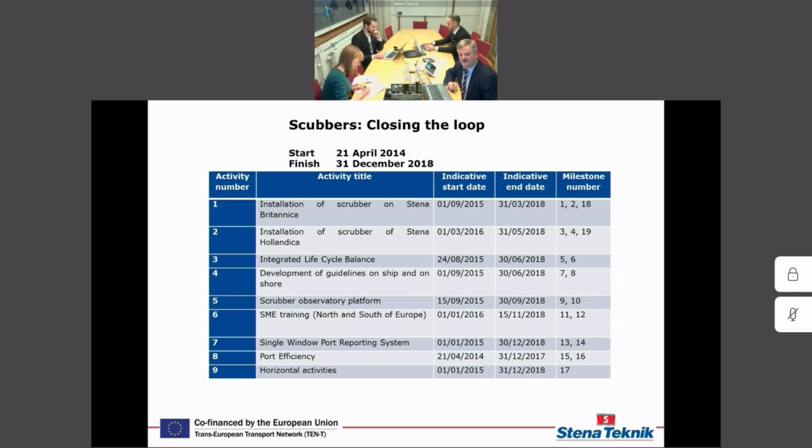We are talking about two ships, Stena Britannica and Stena Hollandica, running between Hoek van Holland in Rotterdam and over to Harwich in UK. We have been doing efficiency work in both ports within this project. But today we are going to talk about the scrubbers, which are on Stena Britannica and Stena Hollandica, where we've been doing installations with closed loop scrubbers.

In connection with this project, we are looking into what I call the soft parts of the project - the technical analysis and so on. We learned that back in 2015, 2016, when we were doing this, there was not much knowledge actually about what is in the scrubber water, what the scrubbers are really doing, and so on. So we have put quite a lot of effort into this also.

As you can see here, Hulda will tell us about the measurement campaigns and the analysis of data, and we have also done the life cycle analysis and the cost benefit analysis. But we are not going so deep into this today, I think.

The next activity was the development of guidelines for ship and shore, and we will hear more about that from Lloyd's Register later on.

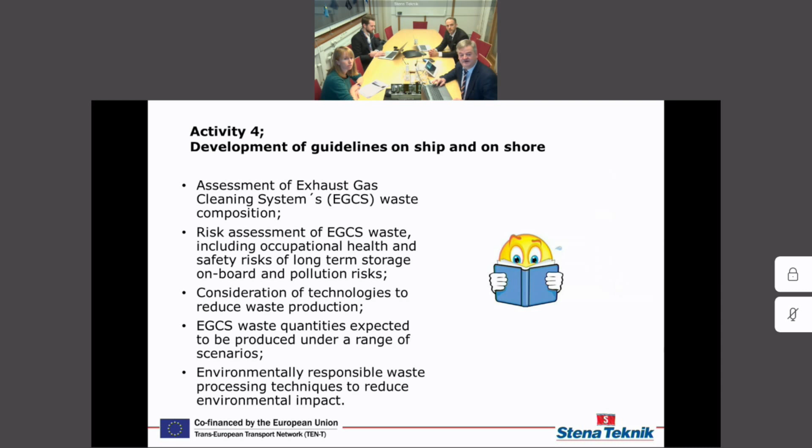We also have the dissemination part of this, which is what we call the Scrubber Observatory Platform. So far we've had two conferences where we have been discussing and presenting our results.

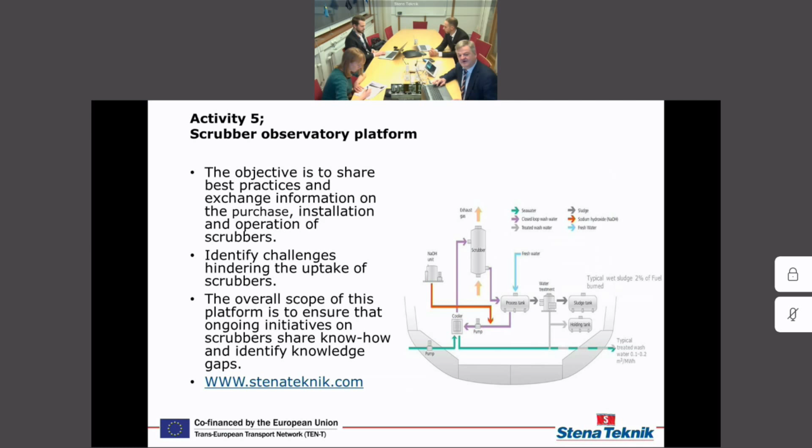This is, you could say, the third conference, but this time it is a little more connected to what we call SME training, North and South of Europe. When we wrote the proposal for this project, that was very much a buzzword - SME training and so on. The idea we had was that we in the northern part of Europe, within the SECA area, we have to start with this, with the scrubbers and so on.

And then at 2020, of course, the rest of Europe and the rest of the world will also have sulfur limits. And then it would be reasonable that we, who are collecting experience already, share that with other partners. So that's the reason why we have this work package.

And I would say that this is what we are doing right now, since we are doing a cost-effective way of doing a conference right now. So in that sense, it's available for everybody. You don't have to make expensive travels and so on.

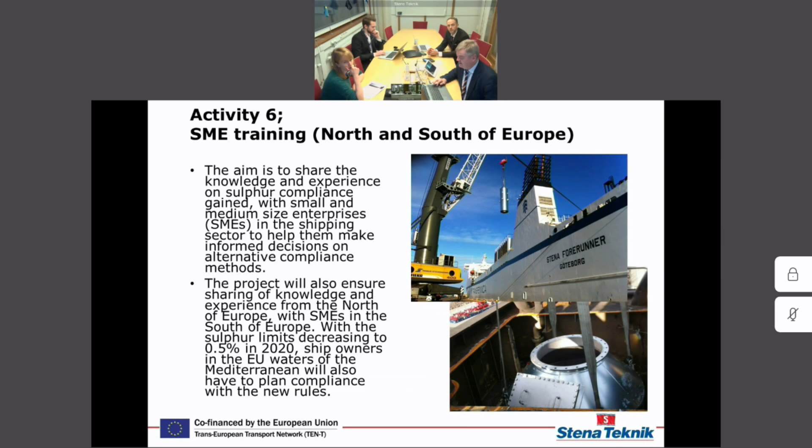We have some other activities also, but the single window port reporting system is unfortunately on hold because of political reasons within the European Union. The port efficiency I told you about, but that's really not with scrubbers, so we leave that. And then of course you always have some horizontal activities.

I will leave it by that, and then I will give the word to Björn, who will introduce us into the magic of our scrubber installations. Thank you.

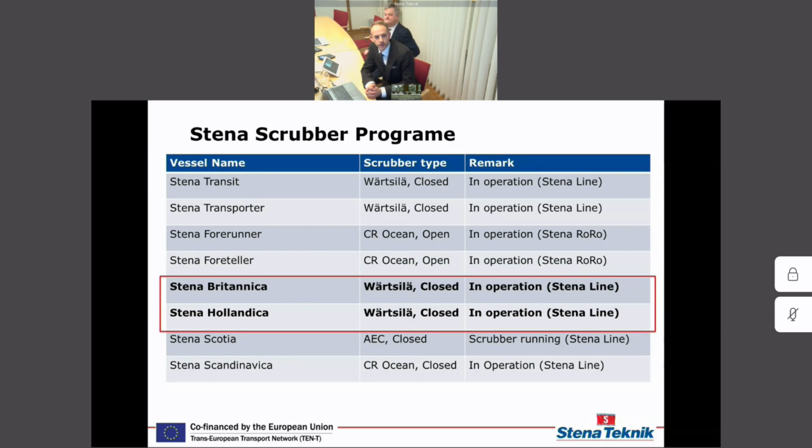Just to give you a little bit of background to where Stena are in the scrubber installation project, we have so far converted 6 vessels by now with scrubbers for Stena Line. They are all closed loop scrubbers, and today we are going to talk about the Stena Hollandica and the Britannica case mostly, which has been co-financed by the European Union.

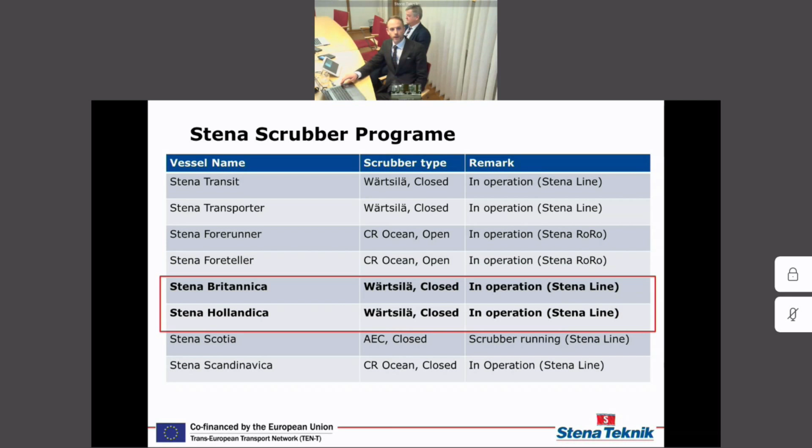Just to give you the idea, let me first tell you what we're not doing in this project, as it's called closing the loop. We've not been installing an open loop scrubber, but for those of you who may not know how it works, I'll give you that for reference.

So in an open loop scrubber, we take seawater in and basically spray it over the exhaust coming from the engine, and then you drain that water out, and by that method you scrub the SO2 and SO3 emissions more or less out of the flue gas and some other things that come with in the process, like soot. They're also washed overboard, which is completely within the regulations.

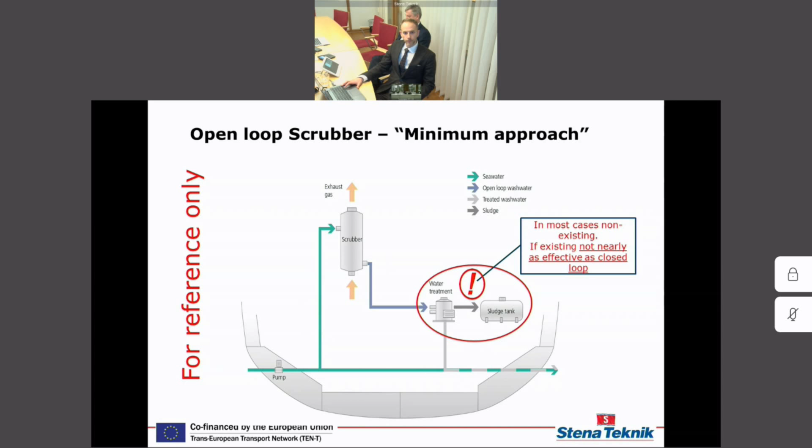In some cases, there is a water treatment plant installed to clean the effluent water before discharge overboard, but in most cases, I would say it's not installed in the larger number of ships today. The open loop scrubber works on the principle that it's using the alkalinity of the seawater and discharging a low pH, acidic effluent into the water.

Looking at the closed loop scrubber, we have a bit different situation. What we do is circulate the scrubber water in a closed system that accumulates sulfates, the sulfur washed out of the exhaust stream. That's why we need to take part of that water out every now and then, or continuously, and take it through a cleaning process, then discharge a smaller amount of water with sulfates overboard.

In order for the closed loop system to work, we need to add an alkaline as it is consumed in the process. In most cases, it's sodium hydroxide, caustic soda. We started off doing that. We have actually now shifted to magnesium hydroxide in these ships just recently, which works in principle the same way in the scrubber process.

The main difference here between the open loop and the closed loop is that we can implement a much better water treatment facility in this system, which is much more efficient than what you could do in the high flow rate that you have in an open loop system. We then also collect the sludge on board. I'll go more into detail with that later on in this presentation.

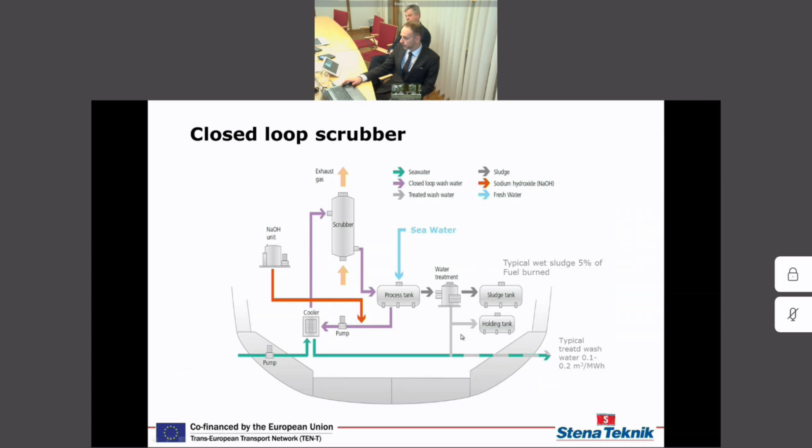Looking at what we collect, the essential part here is that we generate a sludge from the scrubber system, which will then go onshore to a facility. We'll show you more about that later, and that will end up in cement. In the end, the ashes will also end up in cement.

What we see here on the picture to the left is a glass of the initial part of the sludge. We have a fraction that's heavy, which sinks to the bottom, separated out from the water. We have a top part that's floating up, which is lighter, so oily, which is also separated out. And the yellow portion, the water containing sulfates, is discharged overboard.

What we collect looks something like you see on the right two pictures here. It's relatively pasty mud that we collect, we usually refer to it as clay, and this is collected and disposed of ashore. To give you the scale of this, we collect roughly 1% of the fuel we burn in the form of this clay. For the 4 vessels we operate out of Hook of Holland, this is in the neighborhood of 450 tons. We tend to run it a little more wet these days, so it's probably a bit more water contained in this.

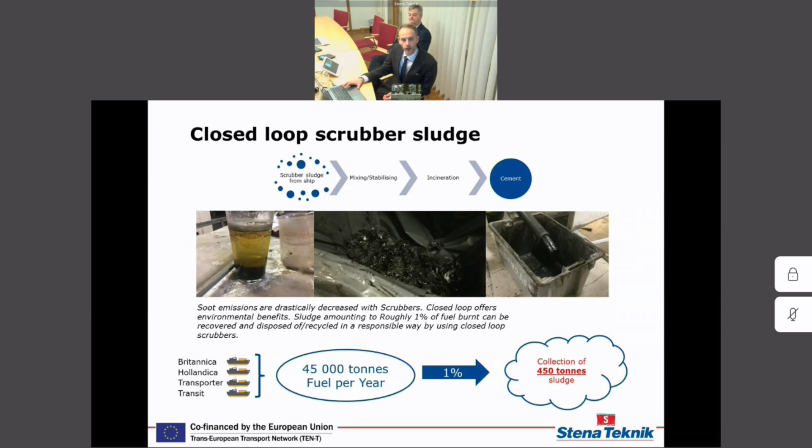Here are the reaction formulas for the scrubbing process. I won't bore you with them, but just to understand why we're going to the closed loop scrubber: we thought the open loop scrubber could contribute to acidification of the sea, and there's no really efficient way of cleaning the water from the other things that come with the process, like particles, hydrocarbons, and heavy metals. Those are the two main negative things we see with the open loop, which we could improve by implementing a closed loop system, generating a pH neutral effluent to the sea and catching most of the particles and hydrocarbons before discharging anything to the water.

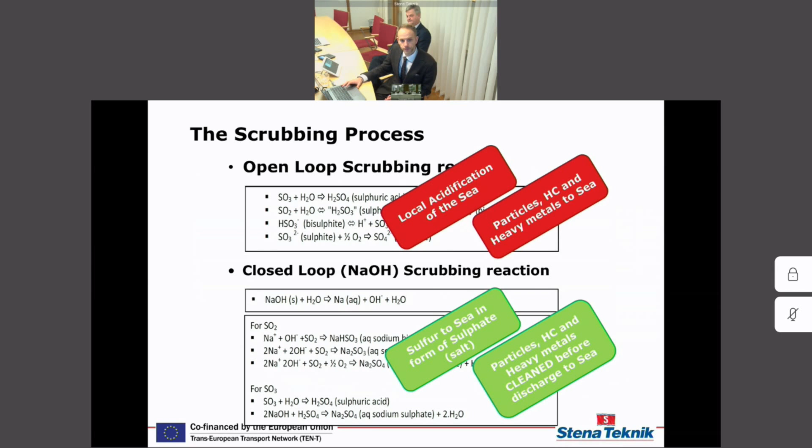Looking at the water cleaning system in close-up, what we've implemented is that we take some of the water out from the scrubber water and run it through a dissolved air flotation unit, called DAF, which then goes into a sludge tank. Here we typically have a water content in the sludge of about 90%, so only 10% solids in this tank. Then we go to a secondary step in the cleaning cycle, through a decantering system, which takes more water out, and we end up with something that's about 30% solid in the sludge that we discharge up to a shore facility.

The other two cleaned water streams then go through a water monitoring system to make sure it's in compliance with regulations, and it's then discharged overboard.

This is just what the IMO says by clean - this is what we have to live up to according to the MARPOL regulations. The turbidity should not be too high, the polyaromatic hydrocarbon level is limited, and the pH needs to be above 6.5.

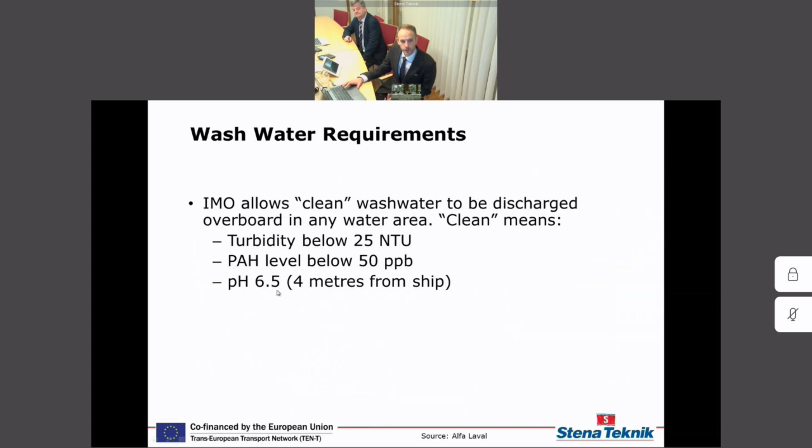To give you an idea of where we are with turbidity, which is the clearness of the water, we can see on this scale that we need to be below 25, and we're somewhere around here, so it's relatively clear water. Again, this is the glass - this is typically what's discharged overboard, the yellow portion, the clear fraction discharged overboard.

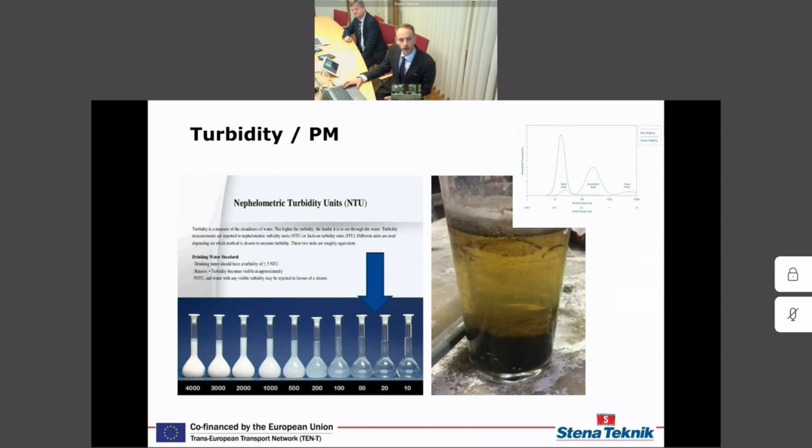Water monitoring is done through an extractive instrument. We've seen that we've had a little bit of problems with clogging of some of the pipes on occasions in these closed loop systems - that's a bit of hassle to the crew. Otherwise, we think it's working pretty well.

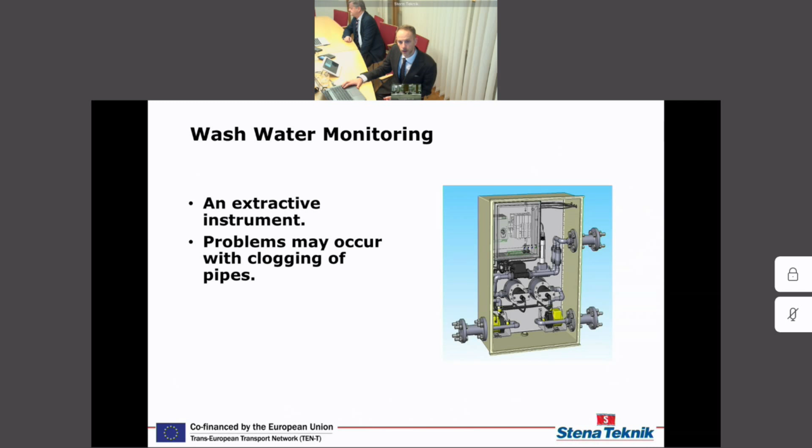This is measured in our case by a Consilium system, a light emitting system.

That is a direct method of measuring through the exhaust gas stream in the exhaust pipe, so not an extractive method.

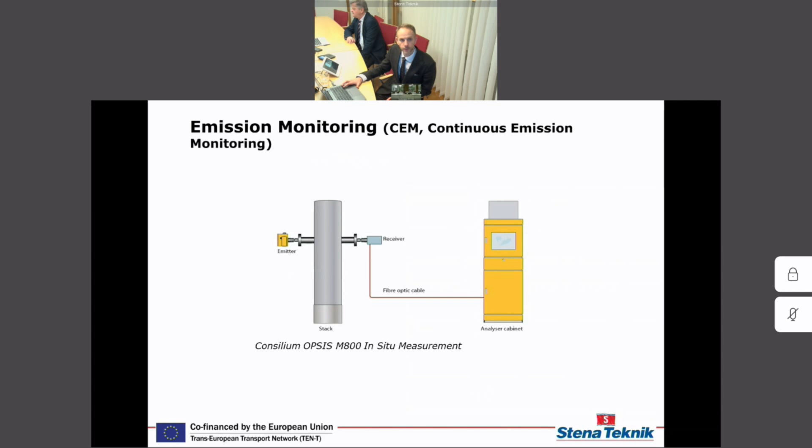The Stena Hollandica and the Britannica are two of the world's largest ferries. They have total main engine power of about 33.6 megawatts and are capable of about 22 knots of speed. They carry about 5.5 kilometers of freight, amounting to about 320 trucks and trailers. It's a four main engine arrangement with two larger and two smaller engines.

We are scrubbing only the main engines on these ships. The auxiliary engines and the boilers are running low sulfur fuel oil.

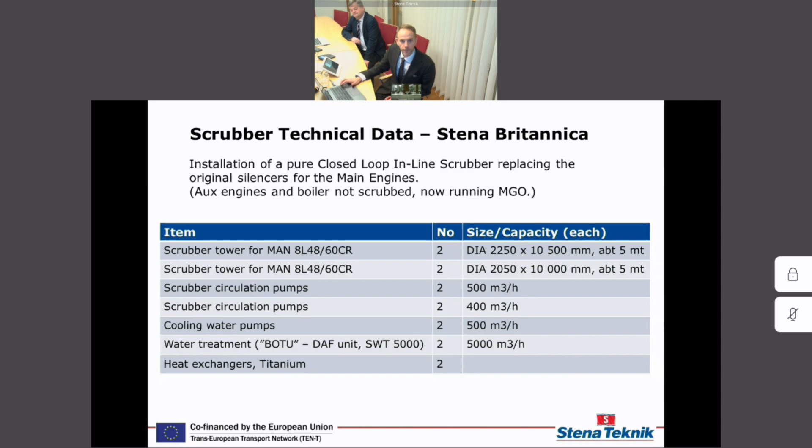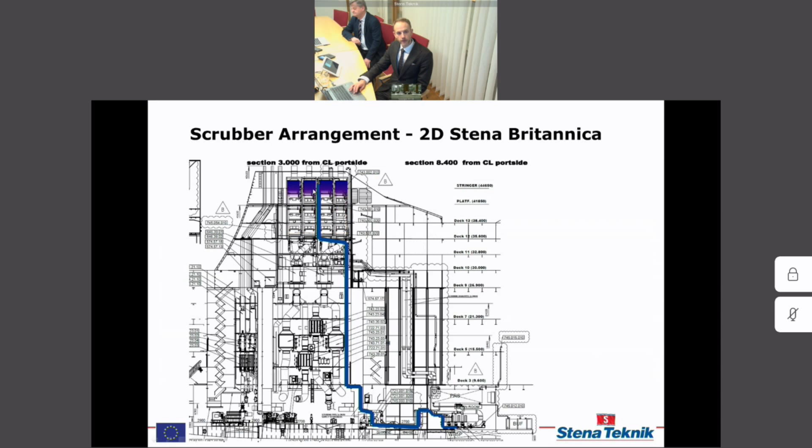Looking at the arrangement of the system, down in the basement we have 4 circulating pumps supplying water through a pipe system up to the funnel and to 4 inline scrubber units. Water is then sprayed over the exhaust coming up through the pipes, and is then drained down through large pipes to a process water tank where it all starts over again. That's the main principle of the system.

This is the same thing, only from our 3D model.

Just to give a bit of detail on the exhaust gas arrangement, in this case we have SCR units installed for reduction of NOx emissions. We have economizers, exhaust gas boilers, and then the scrubbers last in line, and that seems to work okay. On the Hollandica and the Britannica, the SCRs are currently not running, though they probably will be in the near future. We have other ships where they are running in combination with the scrubber successfully.

The main thing here is that we want the high temperature exhaust, which we need for the SCR to work properly. We then take some of the temperature out in the boilers, and then go into the scrubbers, which are operating at a relatively low temperature.

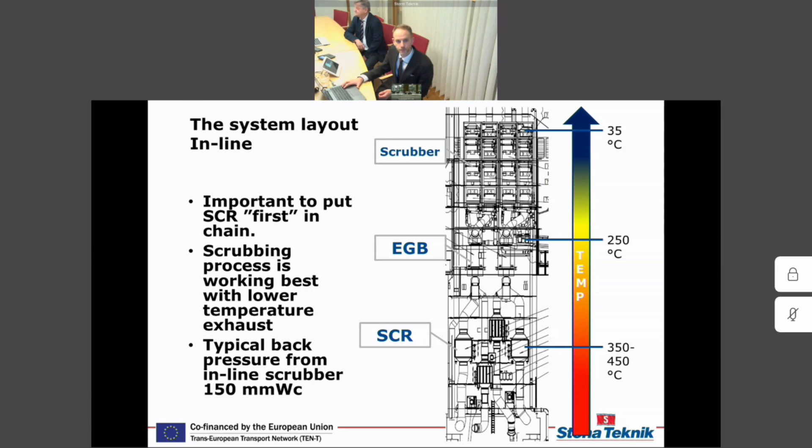Scrubber installation was done at Damen shipyards in Rotterdam. We were 11 days in dry dock to do the installation. We had the scrubbers assembled into units that went into the funnel as one piece, to keep it as short as possible. We then finalized the system in service, which was quite a bit of hassle, including making the final bits of pipework and electrical installations.

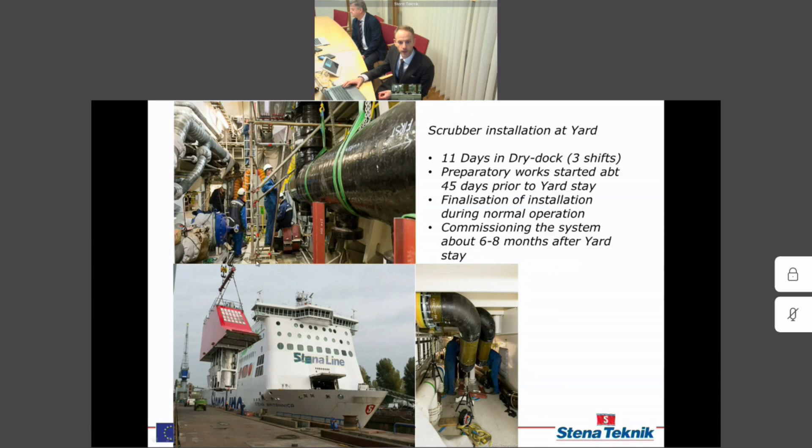Here are some photos from the yard when we did the actual installation. You can see how we started building the scrubbers into modules that went into this funnel module, which was put on top.

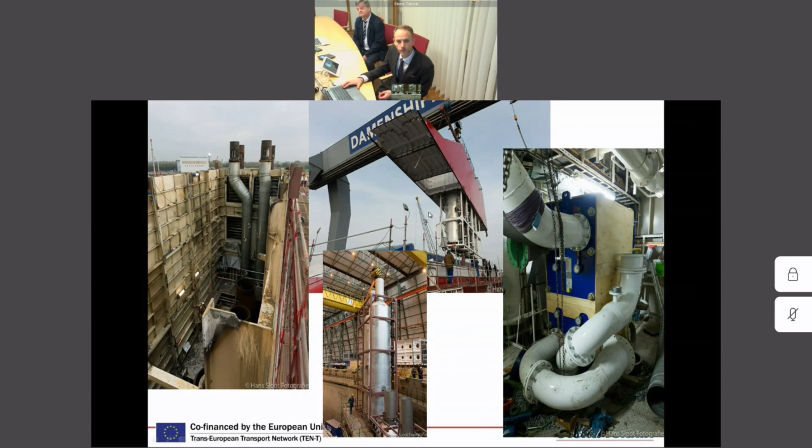Everything was built according to a 3D model generated after 3D laser scanning. Otherwise this would not have been possible to do in such a short period of time.

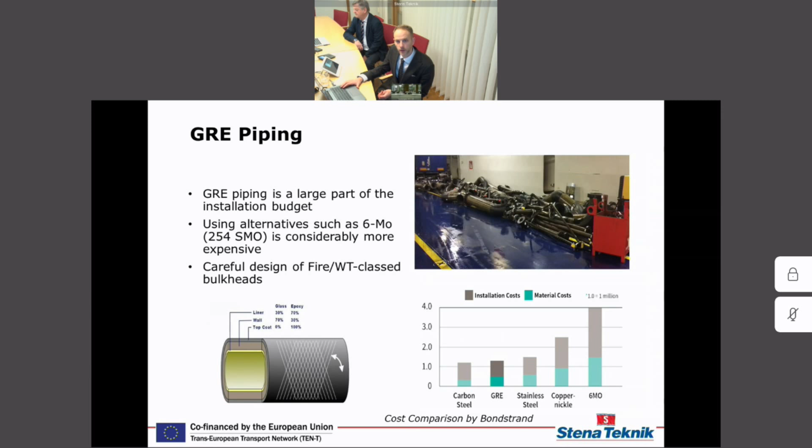A lot of GRE piping was used, hundreds of meters of it in the system. Here you can see a photo of what it looked like at the beginning of the installation, when we took most of the pipes on board.

The pumps are relatively large units installed in the port side fin stabilizer room on board.

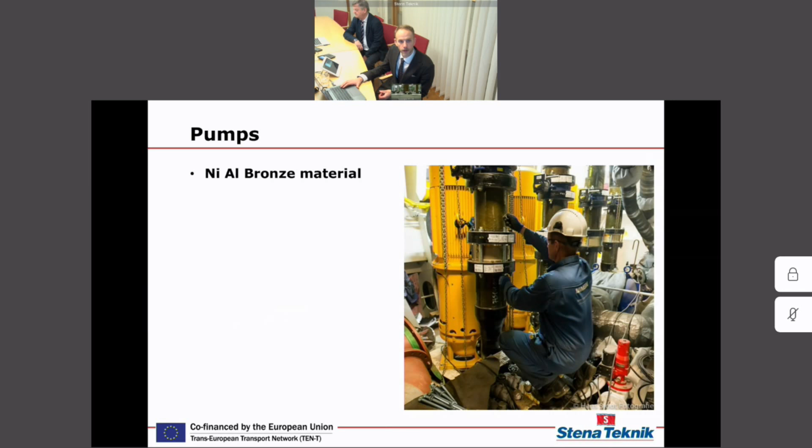To sum up, we've installed a closed loop scrubber, which we think enables better water cleaning compared to open loop. We do not contribute to the acidification of the sea with this system, as we are adding an alkaline to the system. SOx emissions are removed well below regulatory limits, so we are better than changing to 0.1% fuel in that sense. We are also collecting a significant amount of soot that can be handled by state-of-the-art processes on shore.

To give a little bit more detail about that, we have a movie to show you.

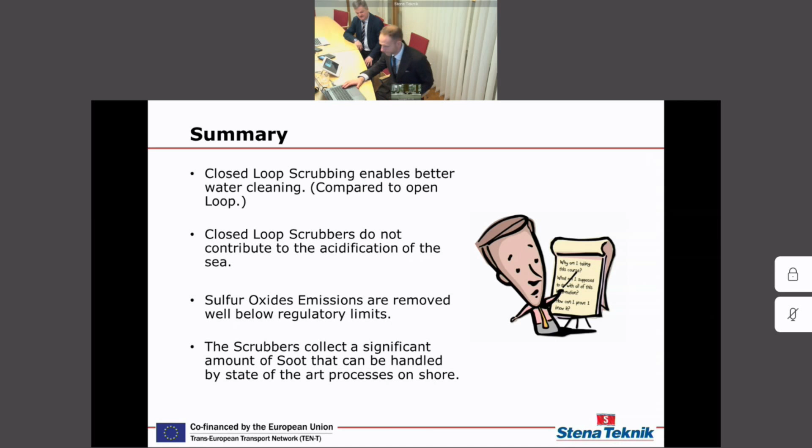That we will do it later. The movie will come a little later. First we will see the movie. Okay, sorry, with the installation. Sorry about that. So let's run the movie. Here we go.

It's February 25th, 2017. At Damen Ship Repair Rotterdam, a new guest is welcomed, the Stena Hollandica. Stena Hollandica is one of our super ferries and is 240 meters long, 32 meters wide. Can take 1,200 passengers and 320 truck trailers, and then next to that, about 250 cars.

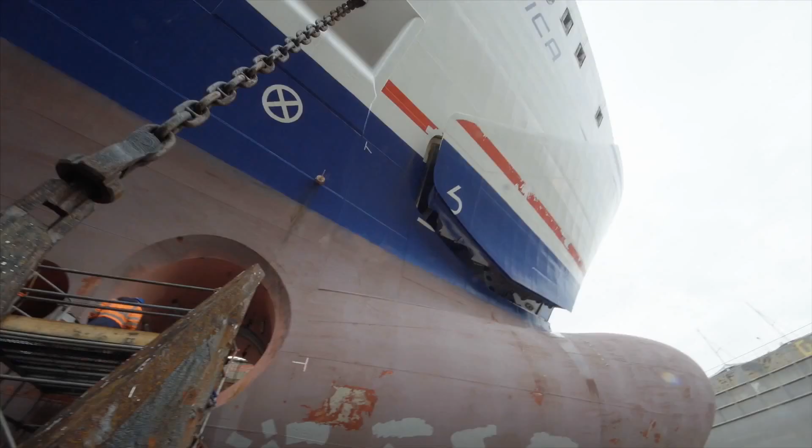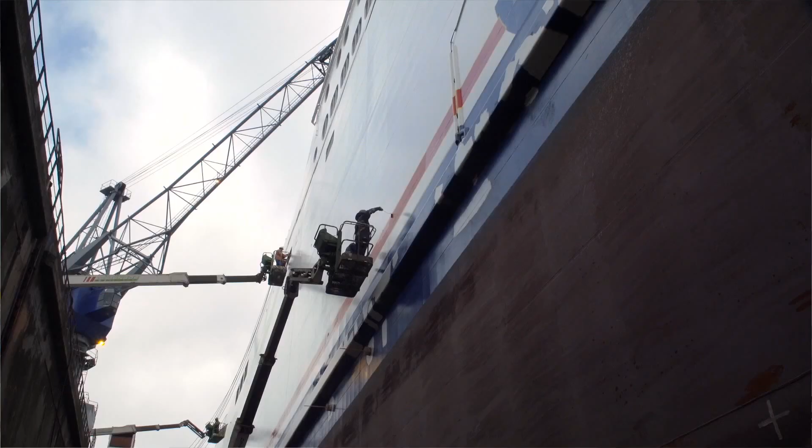A lot of work needs to be done on the Hollandica before she sails off again in less than 2 weeks. At the moment we're at the yard for conversion to scrubber installation in our funnels, and in the meantime we also take the time for a normal docking. In the end, some of the most complex work on the Hollandica will hardly be visible. However, it is proof of Stena's commitment to a sustainable future.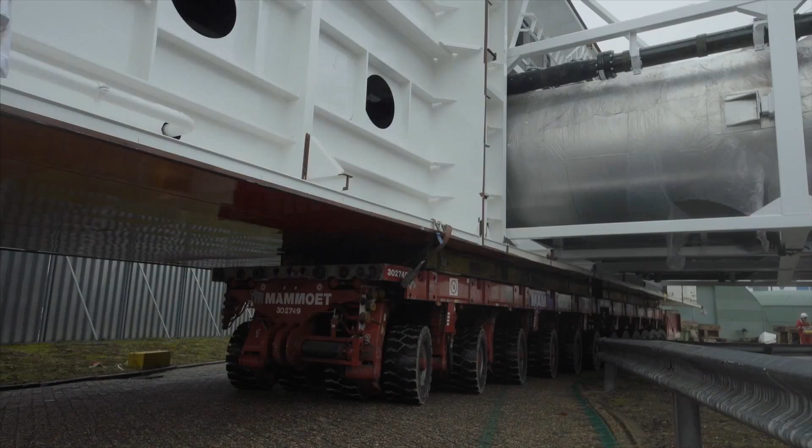We're installing here a scrubber installation. There's a big wash plant for the exhaust fumes that takes out the sulfur and fine particles that is normally blown into the air. We install a closed loop scrubber installation compared to an open loop scrubber, which is also possible. In our case, all the particles will be kept on board and then given ashore for recycling or reuse.

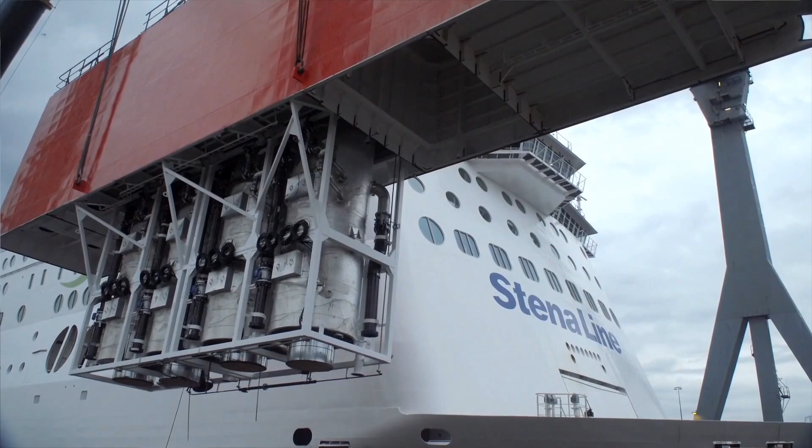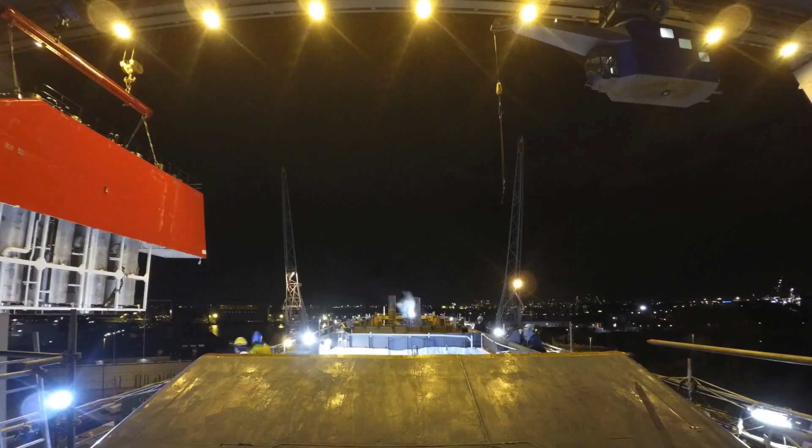We have installed a variety of scrubber installations on different types of ships. Each individual project is unique for the scrubber installations, so we have experience in that. We can really support the client with design and our experience from the installations.

It has been hard work, but only 12 days after she arrived, the Stena Hollandica is ready to leave Damen Ship Repair Rotterdam, freshly painted, serviced, and most important, ready to take passengers across the North Sea, more sustainable and in better comfort.

Okay, I hope that gave you a little idea about the sizes and what this really is all about when it comes to installation of scrubbers. It's quite amazing, the sizes of everything actually. So after that, I know that already some have been asking us about what is in the effluent water and so on. So I think that gives a good reason for Hulda to take over now and to tell us about the scrubbers from an environmental perspective. Thank you.

Yes, so my name is Hulda Winnes. I'm with IVL, the Swedish Environmental Research Institute, and we are a team at IVL who has conducted environmental studies of the scrubber installations on Stena Britannica and Hollandica. I will present some results and some conclusions of these studies today. This will be in a broader context than just the rest product or the sludge of the scrubbers - this will also include emissions to air and water.

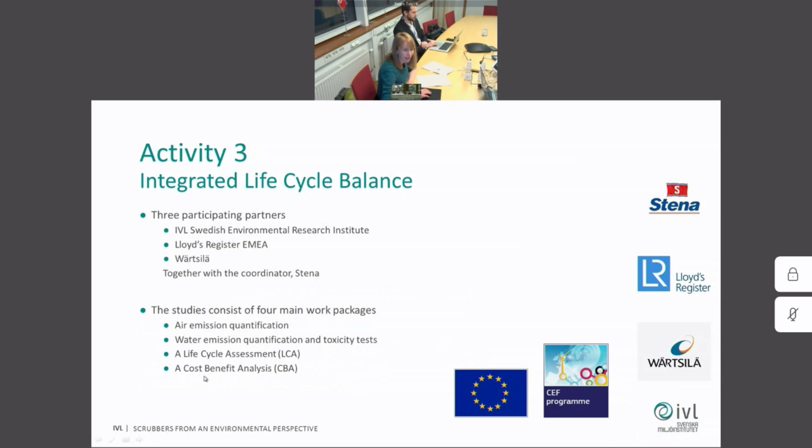Basically what's interesting from an environmental perspective is to compare the different alternatives that you can use on ships to comply with the SECA regulations. This has been our aim in all of the different parts of our studies. We've looked at low sulfur fuel oil as one of the options, and we compared it with using wet scrubbers together with heavy fuel oil.

This will be just some briefs on the study setups in the different parts of the project. For emissions to air, we did some air emission measurements on Stena Britannica. We did 3 test rounds: one on low sulfur fuel oil, and another on heavy fuel oil with and without the scrubber running.

We also took some samples on the solid waste from the scrubber and did some chemical analysis of the sludge. For the water emissions and toxicity tests, we took several samples from both closed loop and open loop systems, and did chemical analysis of the effluent waters on all of them. From the system on Stena Britannica, we took samples at different parts during the process on board, so we could also see the efficiency of the system installed.

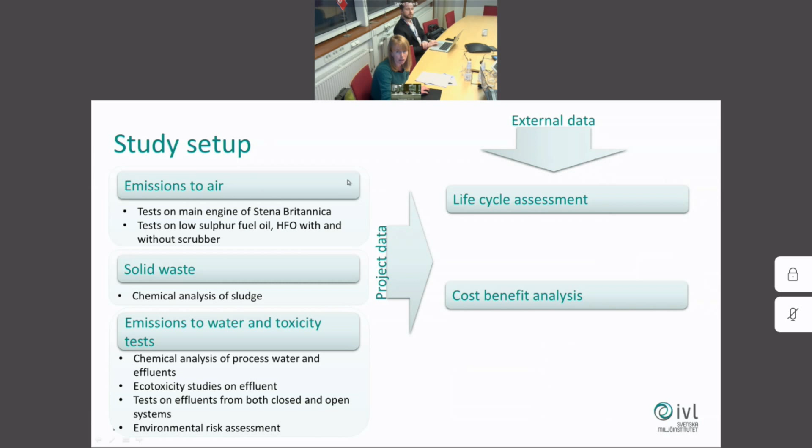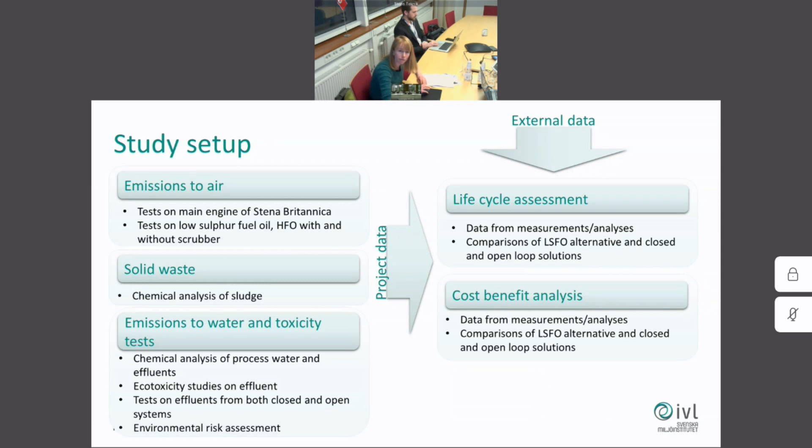On the effluents from open loop and closed loop scrubbers, we did ecotoxicity studies, and from these results we could do an environmental risk assessment. These data were then used in the other studies, the life cycle assessment and the cost-benefit analysis, together with external data from other sources. In both of them, we did comparisons of the low sulfur fuel oil alternative and closed and open loop solutions.

So I will start with going through the emissions to air studies. As I said, we found it interesting from an environmental perspective to compare the different compliance alternatives, but from the measurements we did on heavy fuel oil, where we tested both upstream and downstream the scrubber, we could also say something about the reduction efficiency on emissions over the scrubber.

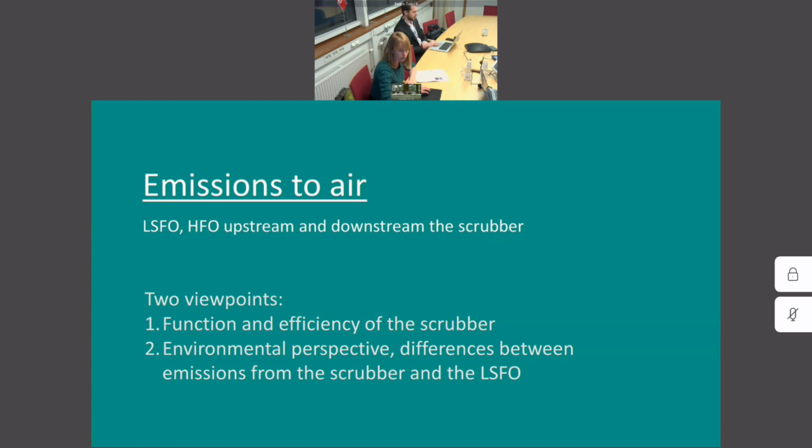I can also mention that when we did these tests, we tested several different steady state engine loads for comparison.

Our main findings include that air emissions of sulfur dioxide are significantly lower downstream of the closed loop scrubber than at combustion of low sulfur fuel oil. We actually had a reduction over the scrubber of 99% or more at all instances.

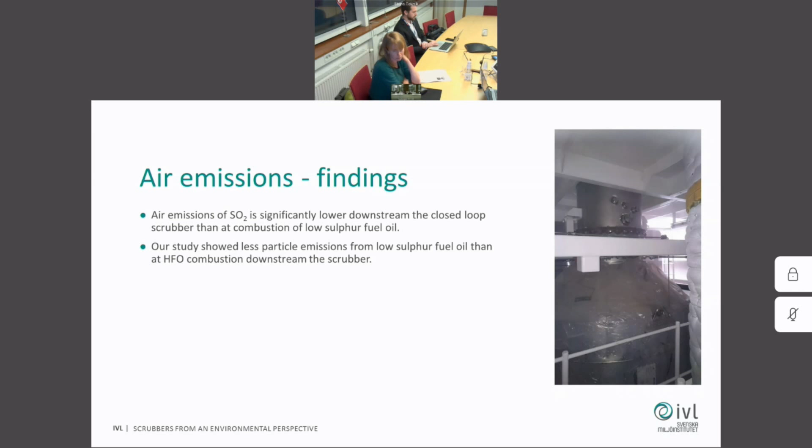And this was even lower than what we had at the low sulfur fuel oil combustion. Our studies also showed that we had less particle emissions from the low sulfur fuel oil than at heavy fuel oil combustion downstream the scrubber. So at this instance, the low sulfur fuel oil had better performance than what we could see from the scrubber studies.

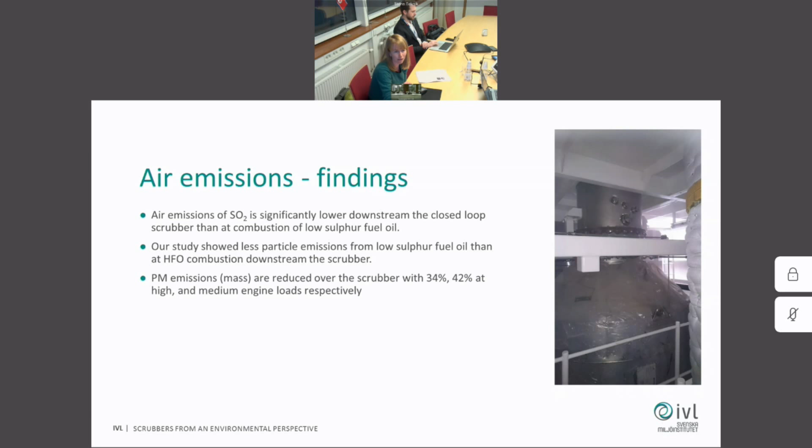We measured particle emissions by mass and could see that they are reduced over the scrubber by 34% and 42% at high and medium engine loads respectively. So we have a reduction from the scrubber, but it's not as efficient. It's not reducing emissions to a level comparable to those of low sulfur fuel oil.

We also looked at different parts of the particles. We have solid particles and we have volatile particles. The volatile particles are more easily affected by conditions in the surrounding environment, so if it's cold or warm, the content of volatile particles is very different. But solid particles are quite constant, independent of atmospheric conditions or test conditions. We could see that a fraction of the solid particles remained downstream the scrubber, approximately 40%.

An important aspect when discussing these particle emissions is that we have no standardized measurement methods that apply for particle measurements in cold exhaust gases, which would actually be quite useful now that more and more scrubbers are installed. All standardized measurement methods are applicable to hot exhaust gases, and that is quite different.

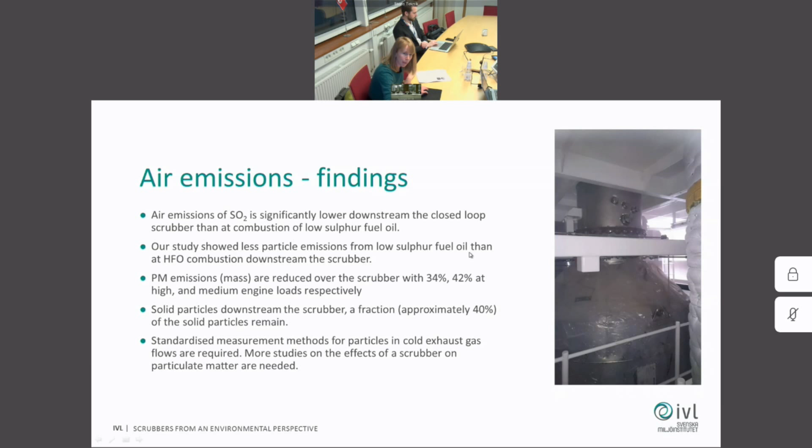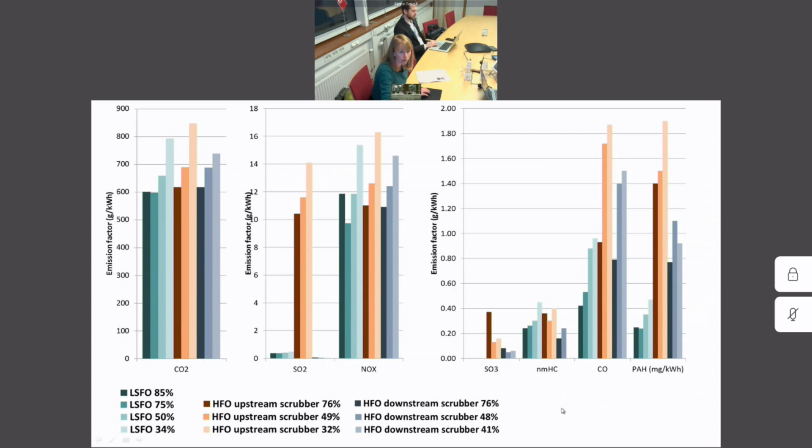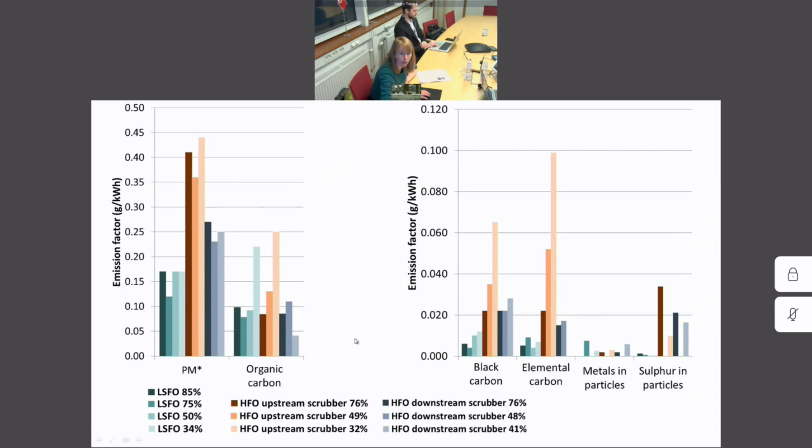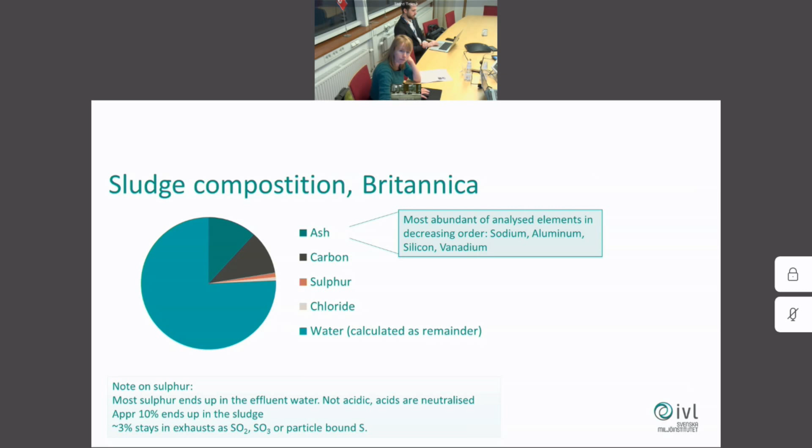I further have this one, but I don't think I will go into such detail.

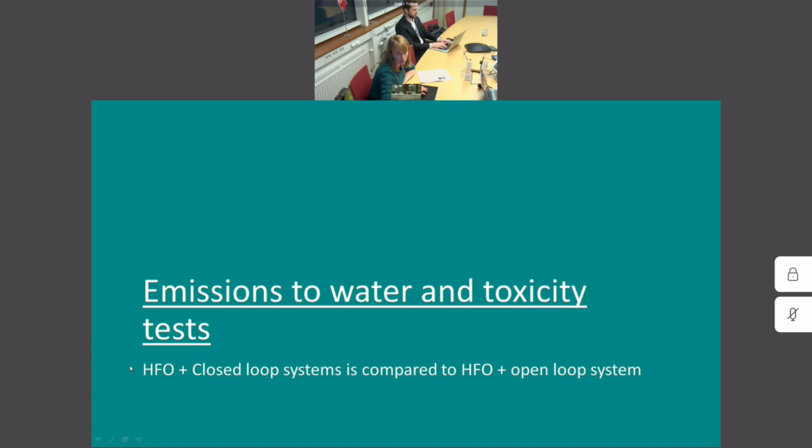Now, concerning emissions to water and the toxicity tests, we did tests on effluent water from a closed loop system and also from open loop systems. Our main findings are that we see toxic effects on marine organisms exposed to scrubber effluent waters from both closed and open systems.

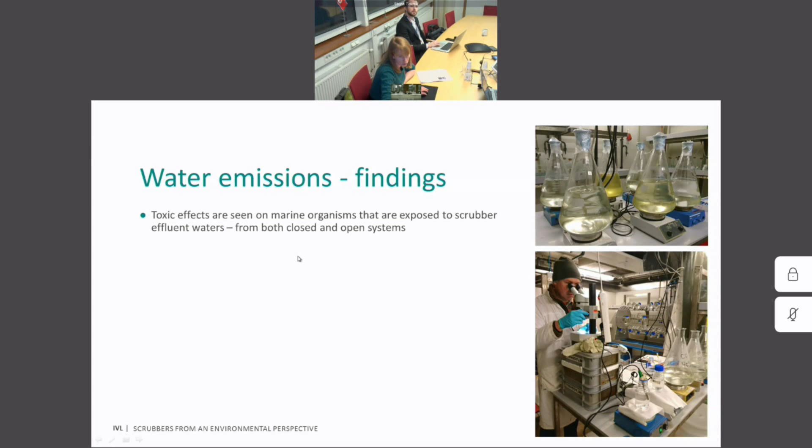We could also see that the toxicity could not be correlated to a specific substance in the water, but rather to the effluent water as a unit and its mix of substances. So the water as a whole proved toxic to the organisms exposed, but we could not relate it to specific substances, neither metals nor hydrocarbons in the water.

We conducted a risk assessment based on the toxicity tests, and that pointed to there being environmental reasons to be cautious concerning effluents from both open loop and closed loop scrubbers. I will tell you more about this later.

An important remark is, of course, that the open loop effluents come with a higher risk than the effluents from the closed loop system, even though we saw risk with both of them.

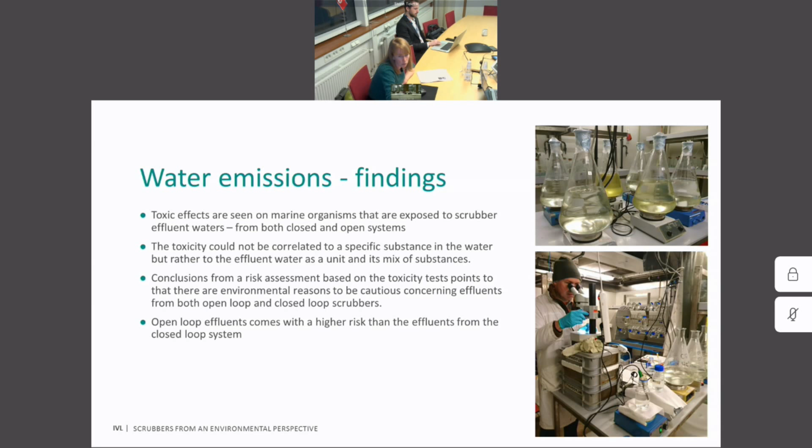So we've conducted toxicity tests, not me, but my colleagues, and what you do is use a set of containers in which you place organisms of a known amount, and you expose them to different known concentrations of the compound that you want to investigate the toxicity of.

From this, you do time series, and you control your containers every day to see how many of the exposed animals are affected. It can be death that you look at, or how often they molt their skins, or many different things that you use as indicators for the functions of the marine organisms that you use in your containers.

And as this is done, of course, you use replicates and reference containers as well, to be sure that what you see is an effect of the compound or water mix that you test. And we did this for, as I said, the closed loop and the open loop system.

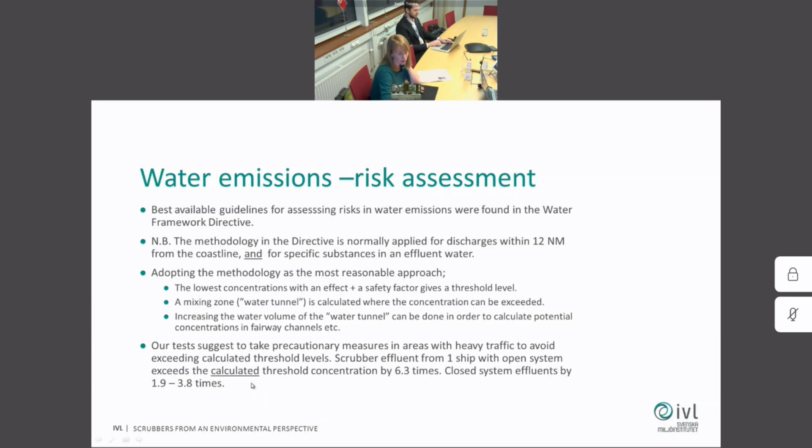Based on this, we could see that the scrubber effluent from one ship with an open system exceeds the calculated threshold concentrations by 6.3 times, and the closed system effluents by 1.9 to 3.8 times, which calls for further modeling of these discharges in sensitive areas. These findings are based on toxicity tests done on the zooplankton we used.

I will show you some very brief results from the life cycle assessment and the cost-benefit analysis as well. For these studies, we compared low sulfur fuel oil with heavy fuel oil and a closed loop scrubber, and heavy fuel oil with an open loop scrubber.

These are the main findings from the life cycle assessment: not very controversially, the operational phase contributes more than the construction and scrapping phase to environmental impacts. Of the three systems compared, the differences in total energy needs are small but slightly in favor of the low sulfur fuel alternative. That's simply because extra energy is used on board to run the pumps and the cooling of the process water. We could also see that all other impact categories except elemental depletion are in slight favor of the low sulfur fuel alternative, but the differences from these studies show very limited variation between the alternatives.

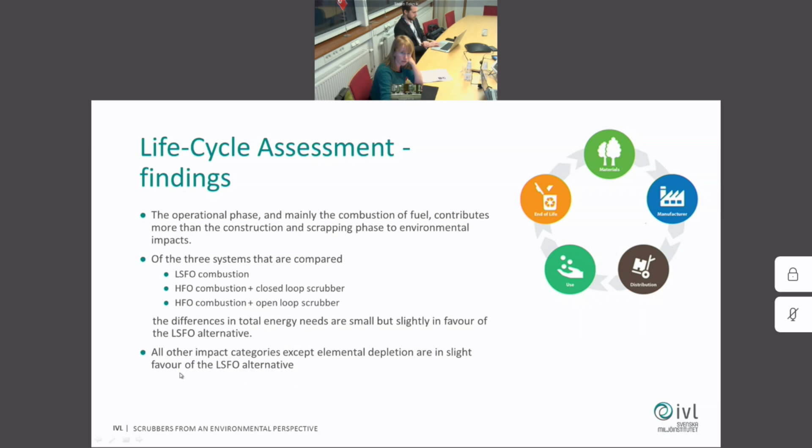For the cost-benefit analysis, where we look at external costs from emissions to air and water, we could see that the effects from emissions to air are dominating the external costs. That's because more energy is needed for the studied closed loop system than for the open loop system, so external costs from a closed loop system are higher than from an open loop system in our cases.

Once again, the differences between the systems are very small, and there are uncertainties in these kinds of studies.

We also looked at external costs from emissions to water, but those are seldom evaluated and are therefore difficult to compare with costs for emissions to air. We could see that the open scrubber system has higher external costs for water emissions than the other two options, but the differences are very small. From an uncertainty analysis, we could see that from an external cost perspective, the low sulfur fuel oil alternative is beneficial compared to HFO with a closed loop scrubber system, though the open loop was not tested.

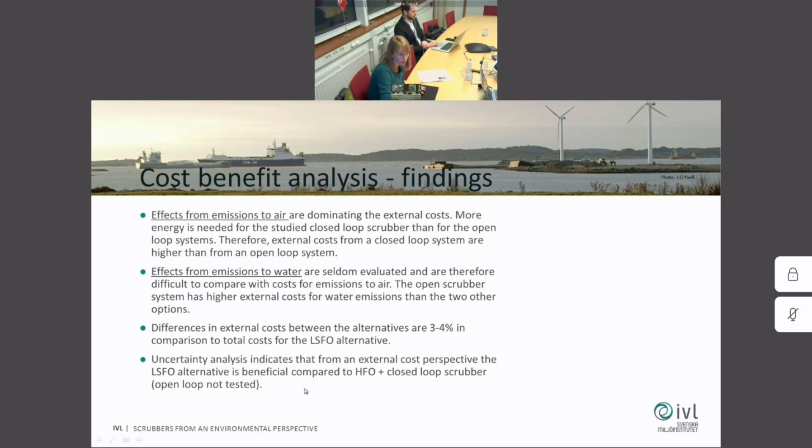Okay, thank you. Thank you very much, Hulda. Well, that's a lot of information.

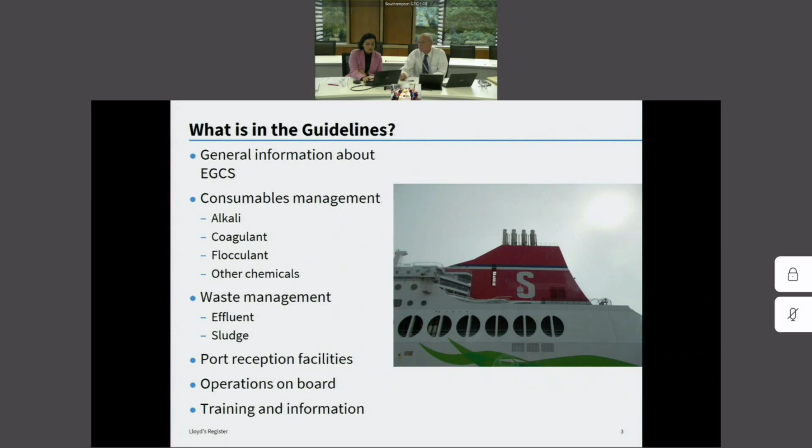So now I'll ask my colleague Andy to carry on.

Good afternoon, everybody. So, going down to the actual consumables that we have on the system, such as the closed loop scrubber, the primary one is the alkali. As Per and Bjorn have already described, this is the major input onto this system. Now, since in this instance we use a 50% aqueous solution of sodium hydroxide, this is a pretty hazardous material in itself. It has to be recognized. This is not a material that people are used to handling in bulk quantities within the engine room system.

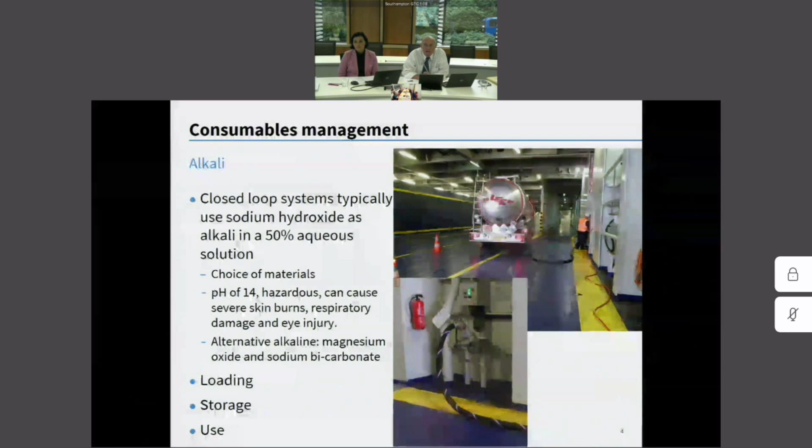In use, we have circulating caustic soda around the system, both as Per showed in the direct injection into the scrubbing loop, the wash water loop, and also a smaller line that goes off to the bleed off treatment unit to ensure that we've got neutralized effluent that goes off the ship at the end of the day.

The point with that is we've got pipelines running around the engine room with a toxic, dangerous material in them, and they have to be duly marked up, duly labelled, and due caution applied when moving any other equipment around the engine room. So that's the bulk consumable, if you like.

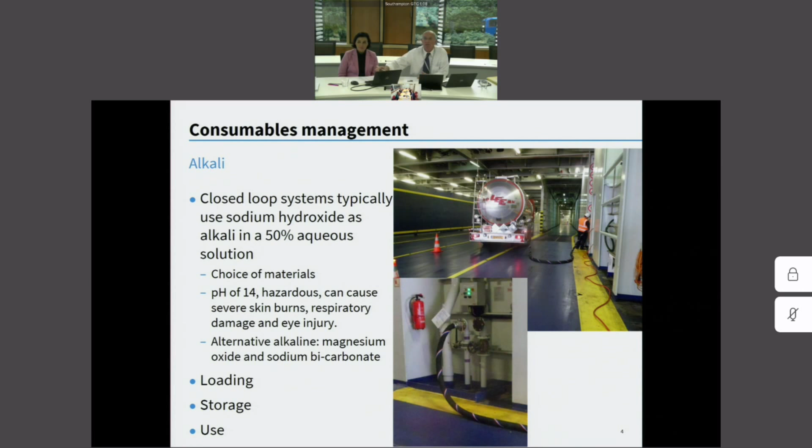At the end of the process, of course, is down in the bleed-off treatment unit, and due caution always needing to be applied there whenever work is undertaken on that particular piece of device.

And neatly finishing off in this instance, we have the flocculant. So we've had the alkali come on a road tanker, we've had the coagulant come on in the IBCs, and the flocculant comes on in these 25 kilo drums.

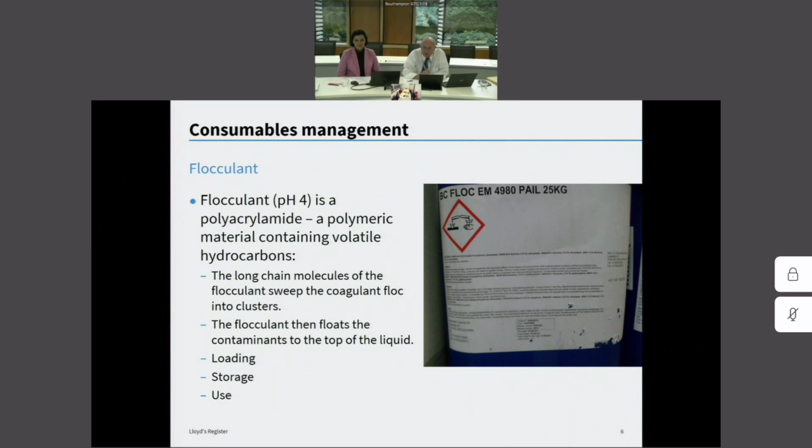We also have some other chemicals on board, the calibration checks on the effluent monitoring, for the turbidity sensor and for the pH sensor. And also we may have test gases for the exhaust gas monitoring device as well.

So each of these has to be handled and taken care of in accordance with the MSDS, which we supply with that product at the time of delivery, both for the folk on board and for other folk who would come into contact with that in the course of their business on the ship or indeed within the port area.

So we've got effectively there the 4 streams of consumables coming onto the system. So I'll now hand back to Yildiz for the waste management side of things.

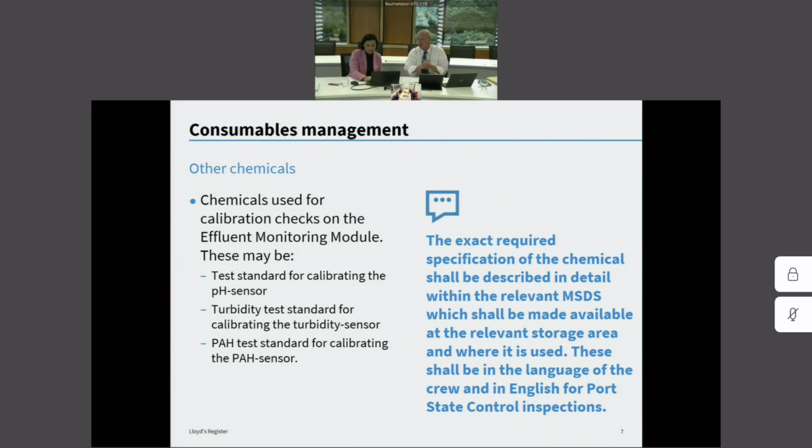Thank you, Andy. So Andy has covered the consumables, so I'll move on to waste management. So this is now the waste coming from the exhaust gas cleaning system. We divide that into 2 bits, effluent and sludge, as mentioned before.

Thankfully for the effluent, IMO has worked hard and we have a set of guidelines, MEPC 259(68). These guidelines place emission limits on effluent discharge. Providing the emission limit values are satisfied, they allow the exhaust gas cleaning system to operate while discharging effluent to sea with no further restrictions.

However, obviously, there may be additional national and regional local restrictions that would apply, so that due care must definitely be taken into account. So in terms of an open loop exhaust gas cleaning system, the effluent may be treated and will be diluted before discharge to sea.

For a closed loop exhaust gas cleaning system, which would require bleed off from the circulated wash water, and after treatment may be discharged to sea. However, the bleed off rate can be low enough for this to be temporarily retained in holding tanks for later discharge to sea or a suitable reception facility landing ashore.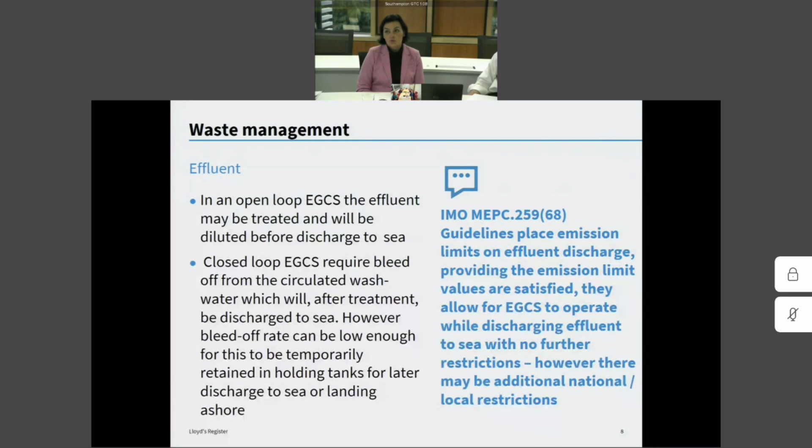So effluent is still mentioned within the guidelines, but it is actually covered by IMO MEPC 259/68. I'll move on to sludge, which is the part we are mostly interested in when talking about waste from exhaust gas cleaning systems.

Within the guidelines, we provide certain elements in terms of how they shall be stored on board and how they shall be discharged as well. There will be a small video from Stena Line - I've seen it with Per yesterday. That will also give you some insight into the discharge processes, which will be interesting after our presentation.

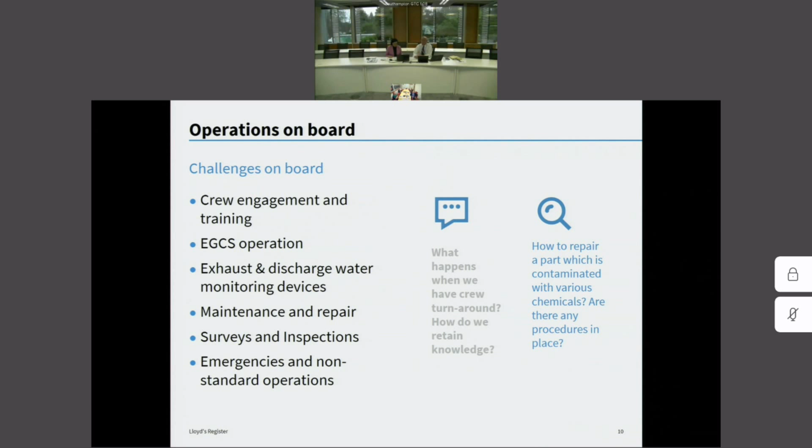Okay, I think this is it - so I'll just take over on the section on board, because of course the major thing with any such guideline as this is you've got to engage with the people on board.

Crew, ships' engineers these days are faced with ever more complex and new systems being loaded onto the ships, systems which they frankly don't have any past experience with. So there's got to be engagement and a training process in order to take that equipment on board - how the system is actually operated and the monitoring systems that go along with it, how to handle, how to repair, how to maintain the system.

Both to show proper performance at the time of surveys, for MARPOL Annex 6 certification, and of course such equipment as exhaust gas cleaning systems is very likely to be quite a point of focus of port state control inspections - to see that this alternative equivalent means that's been allowed on board does indeed function effectively and safely.

Now, largely in this presentation we've been talking about an operating ship. But of course we have to take into account, and our guidelines have looked at this, what happens in emergency situations - for example, do we have a situation where we have a massive breakage of a caustic soda pipe within a ship?

And in terms of non-standard operations, these ships, as we've said, shuttle backwards and forwards between Harwich and Hook of Holland, but of course in this instance they go for periodic docking. In a docking situation, you've got potentially caustic soda on board, a whole heap of dockyard crew on board, or riding crew on a ship, that need to understand there are pieces of pipework, pieces of tankage on board which do not contain the typical engine room type fluids.

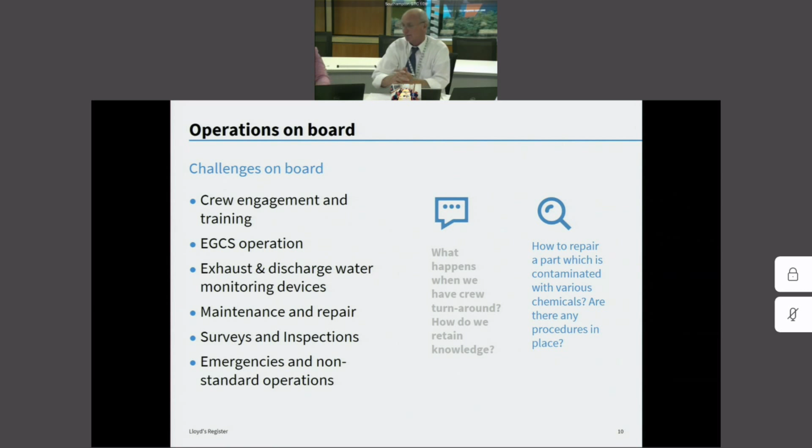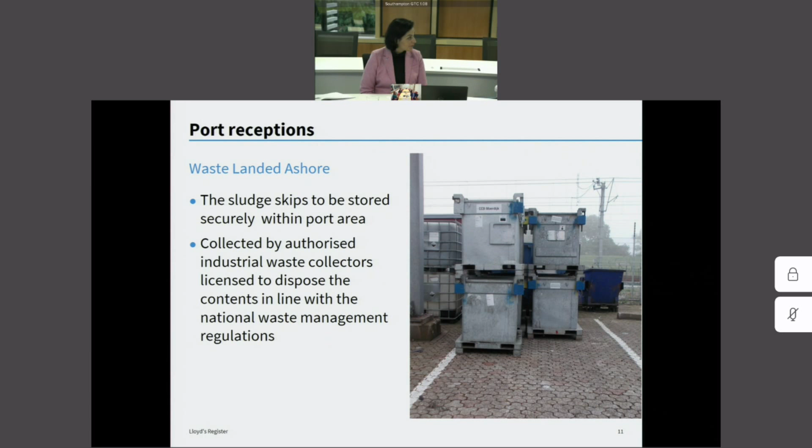And that needs to be developed by each company so that it's specific to their ship, specific to the system on board, as well as the consumables and waste generated on board. There are some areas I want to make sure I highlight, so I'll check my notes if that's okay.

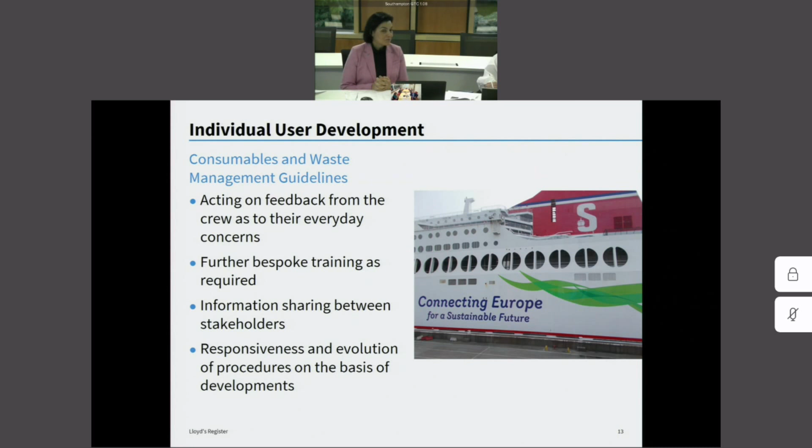Okay, we hand back to you then. Thank you very much, that's very interesting indeed.

One little question: will these guidelines be available publicly also? Yes, a public version. That is the idea, they're supposed to be prepared in a generic format so they would be available publicly. Of course, it's all European Commission's.

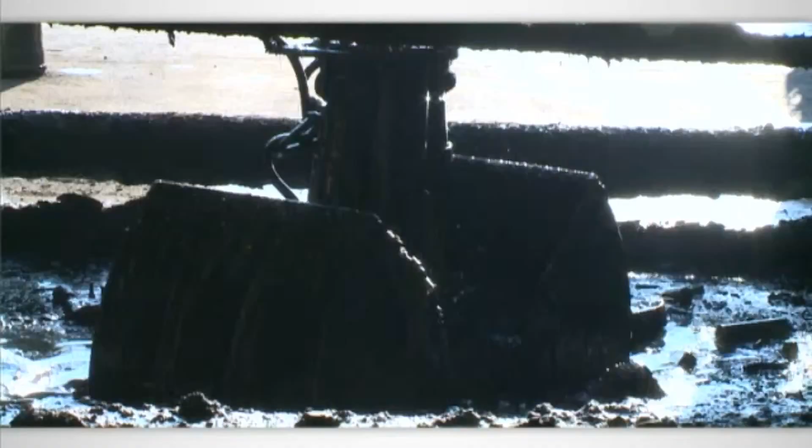Geocycle is a pre-treatment platform for industrial waste destined to be recycled in cement plants. In Greek, geo means earth and cycle evokes the cycle of life. Geocycle refers to our ability to transform waste into a safe and usable source. Geocycle, present in over 40 countries worldwide, offers companies a safe and effective solution for their waste management. Sludge from industrial wastewater treatment plants is stored, homogenized and shipped to the dryer crusher at the Åbo plant. Muddy, pasty waste is delivered in barrels or in bulk. After unloading, it is homogenized and shredded to obtain a compact consistency.

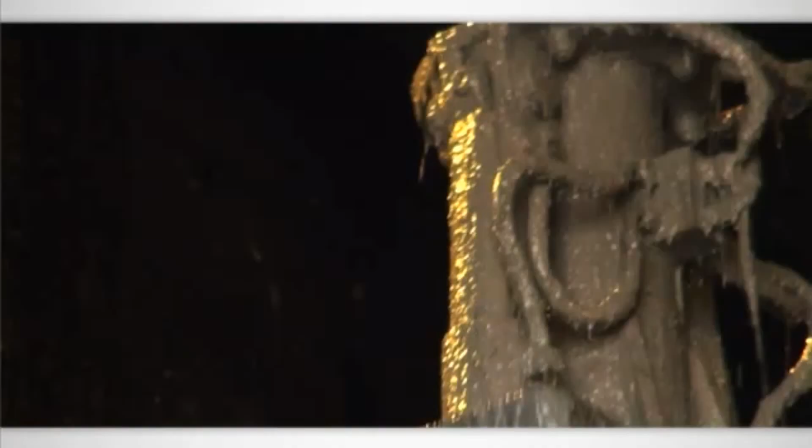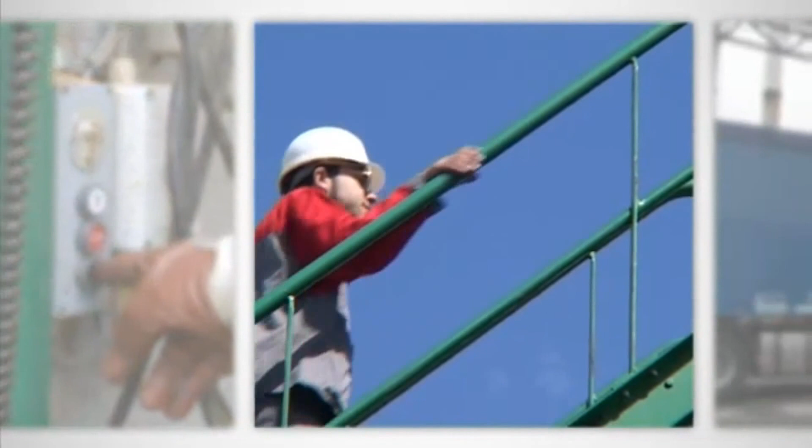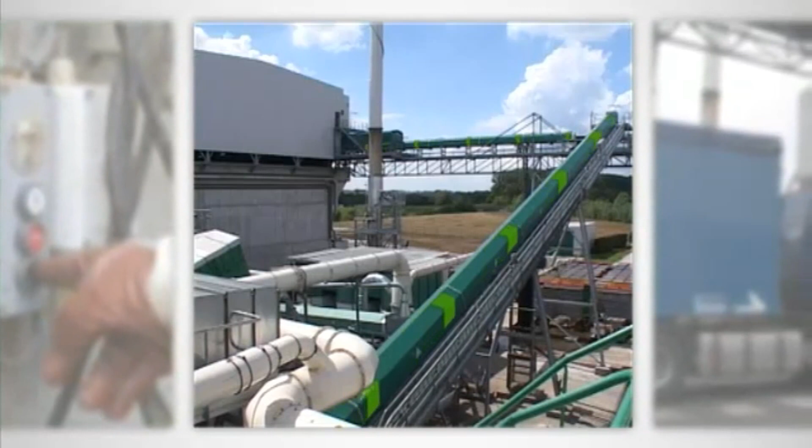An impregnation support, such as sawdust, is mixed with the waste mix in a blender inertized with nitrogen. A magnetic separator removes the ferrous materials before the mixture is screened several times. The fine impregnated sawdust is conveyed to the storage hall, and the residue from screening is dispatched to a dedicated cement plant.

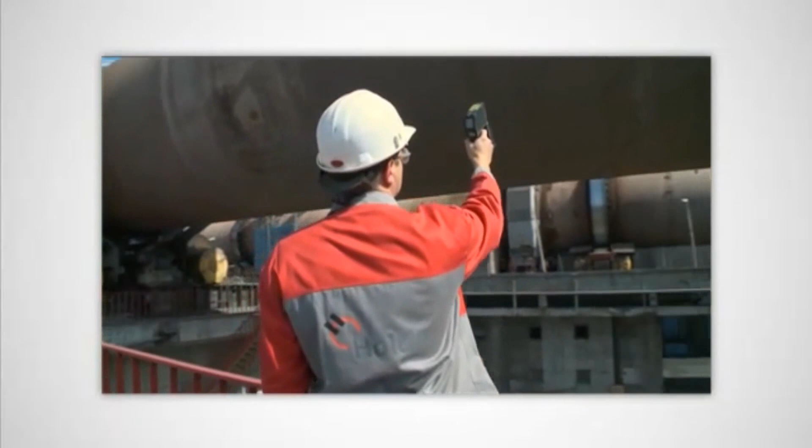Alternative fuels provided by Geocycle are injected directly into the kiln at a temperature of 2000 degrees centigrade. The organic fraction of the fuels prepared by Geocycle is completely destroyed, producing thermal energy, while the mineral fraction, close to the clinker composition, fully integrates the clinker crystal structure.

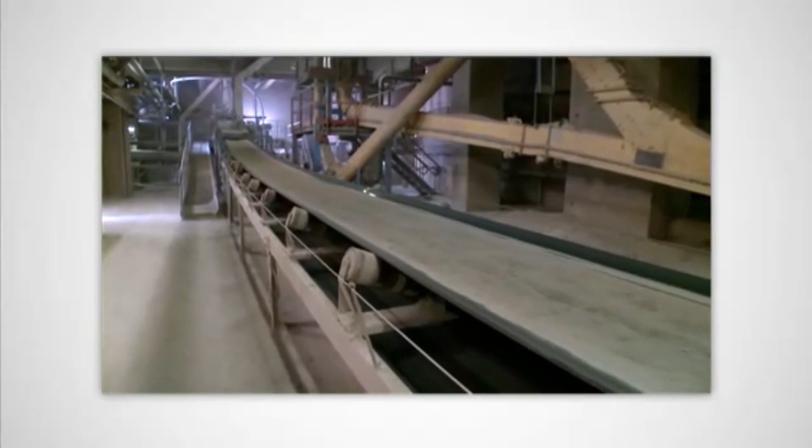This is where the recovery of waste that is pre-treated at Geocycle and then co-processed in cement plants really makes sense. There is no final residue. In addition, it provides a significant saving in raw materials and fossil fuels. Geocycle: a safe and responsible solution for industrial waste management and recycling in cement plants.

Okay, alright. I hope that gave you a fair idea about what is really happening with waste. As you can see, there is nothing coming out at the other end of this treatment, which is quite great. I think it will end up in a vast building somewhere around Rotterdam, I suppose. We are actually doing the same thing on our ship Stena Scandinavica here in Gothenburg, collecting the waste and treating it in the same way.